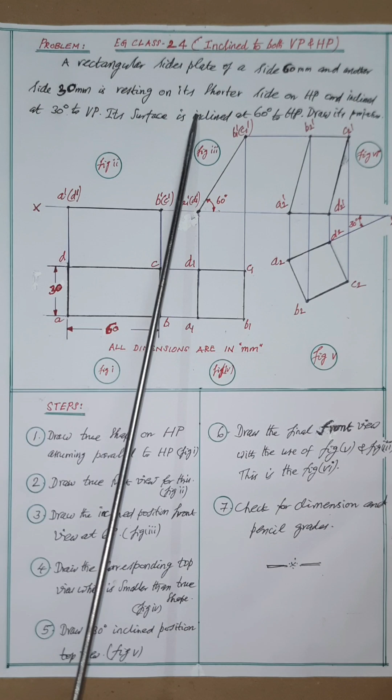A rectangular size plate of side 60 millimeter and another side 30 millimeter is resting on its shorter side on horizontal plane

inclined at 30 degree to vertical plane. Its surface is inclined at 60 degree to horizontal plane. Draw its projections. This is the problem given.

Here, as per terms given, the final image cannot be drawn in two figures as it is inclined.

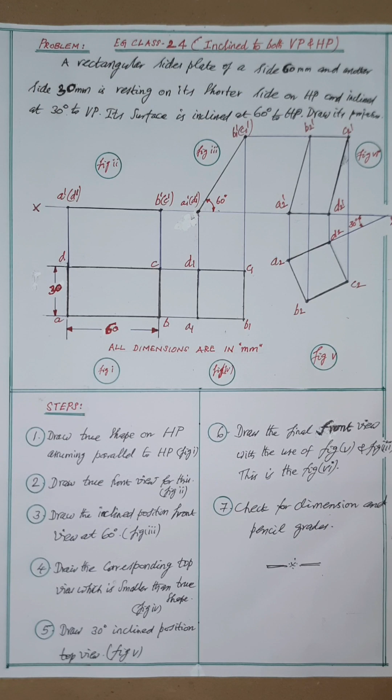Moreover, since it is inclined to both planes at a time, the final image can be completed to both planes only in 6 figures as shown here in this situation.

Now, see here the completed drawing with 6 figures drawn in order and indicated for reference to draw only in the given order because that is the possibility.

As told earlier, drawing the figure is easier, but understanding each step with the reason why is important. That is why follow the steps.

That is, let me explain the step-by-step procedure in detail to understand with the concept for getting the benefit of doing the other problems on your own without referring.

As per step 1, the first true shape is to be drawn in the horizontal plane as top view, assuming its surface is parallel to horizontal plane without inclination and perpendicular to vertical plane.

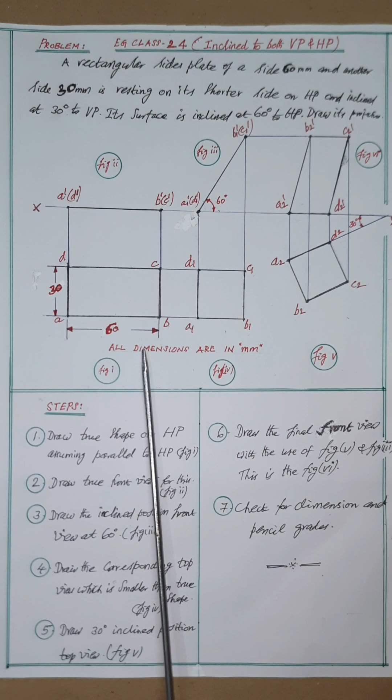Since it is rectangular as per the given problem condition, the shorter side of 30 millimeter is resting on horizontal plane. Hence, this side of 30 millimeter should be perpendicular to XY line,

that is, to vertical plane, at a sufficient distance. So, after the XY line and this side are drawn,

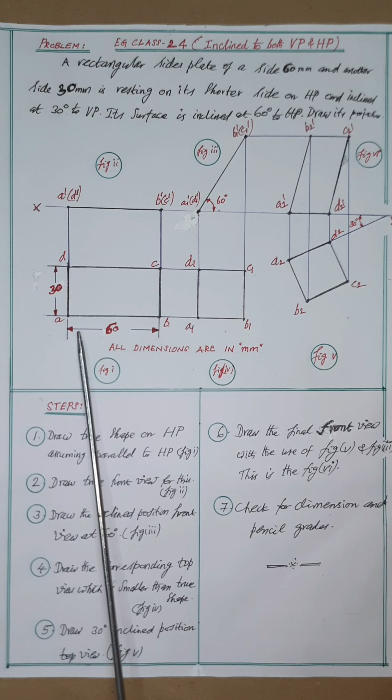draw two parallel lines to XY on the 30 millimeter perpendicular line and complete the rectangle with 4 sides as shown in figure 1.

This is the true shape and size of the plate through the top view.

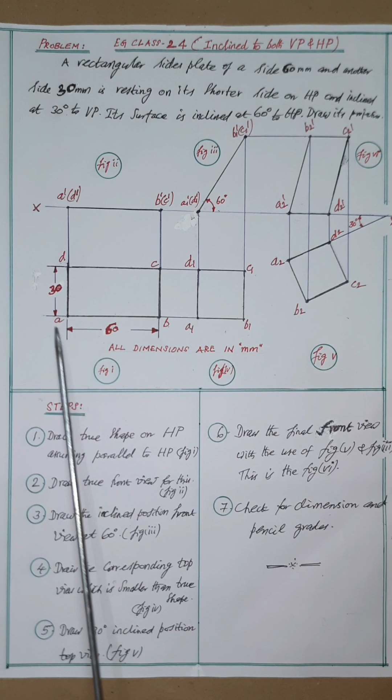Now, as per step 2, by projecting perpendicular lines to this figure 1, draw the front view as a single line on the XY line as shown.

This line is marked with front view letters as shown here, and this is the true front view when the shorter side is perpendicular to vertical plane, taken as figure 2.

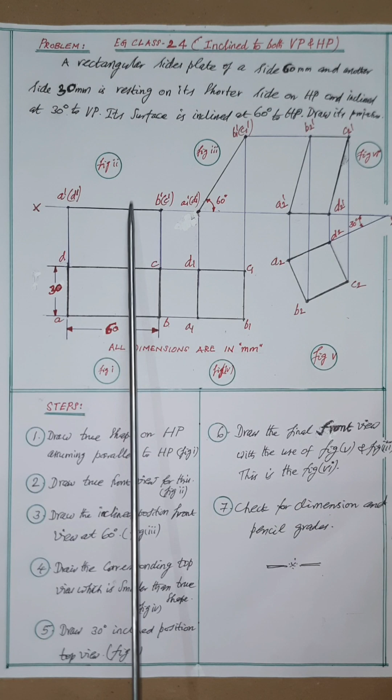This one is figure 2. This is A, B, C, D. Invisible corners are shown with letters within brackets, that is D dash and C dash, when seen as a front view.

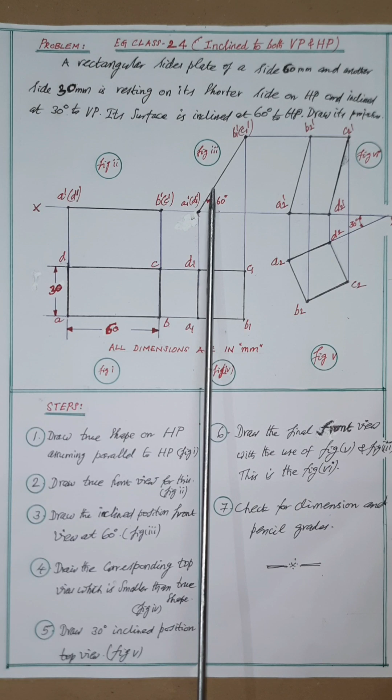Next, as per step 3, figure 2 may be drawn at a 60 degree inclined position to the same original length as figure 3, marked as shown with the 60 degree line.

This figure 3 is the front view position, that is 60 degree inclined to horizontal plane.

Now, as per step 4, the corresponding top view can be drawn in horizontal plane by projecting the lines below XY from figure 3 as shown here.

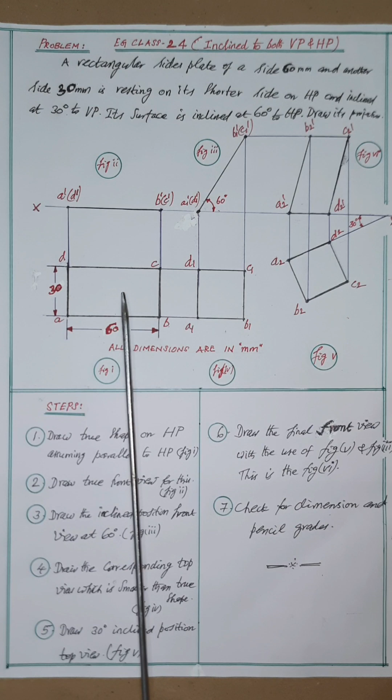Project figure 1 through parallel lines to XY. Both projected figure lines meet at 4 points as shown, name them suitably for the second top view as shown.

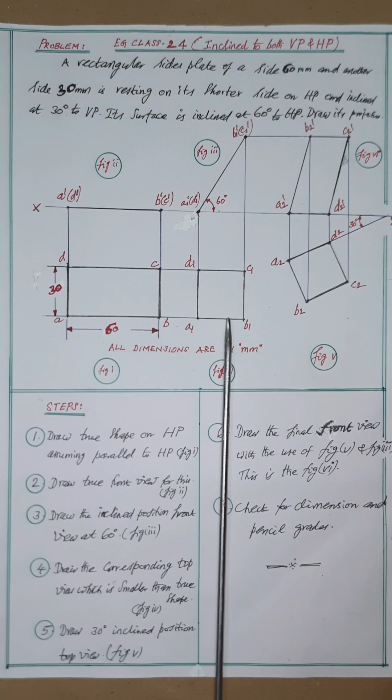This is smaller than the true shape shown in the first top view, and name this as figure 4.

Next, as per step 5, draw a 30-degree inclined line to XY as shown.

Since the final image is inclined at 30 degree to vertical plane, as given.

The final top view is similar to the second top view except satisfying the condition of this 30 degree inclined position. Hence it may be redrawn in the inclined line,

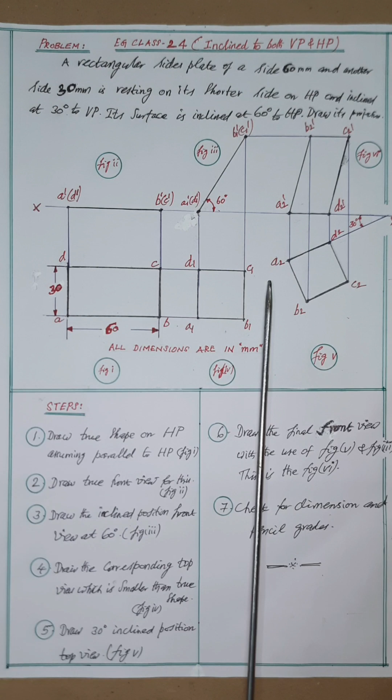merging the shorter length given in the inclined line, that is A2 to D2, that is A and D should

come in the inclined line, making other lines as shown, that is B2, C2.

Name the corners for the final top view as A2, B2, C2, D2 based upon this A1, B1, C1, D1.

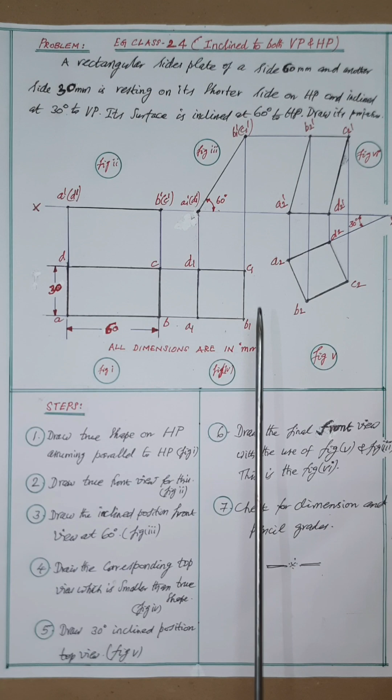That is, this is the final top view. Remember, merging the line with the inclined position should only be A1, D1 and then named as A2, D2 as

shown, without doing mistake, as this is the given condition in the problem. This is once again brought here for remembrance. Now figure 5, the final top view, is over.

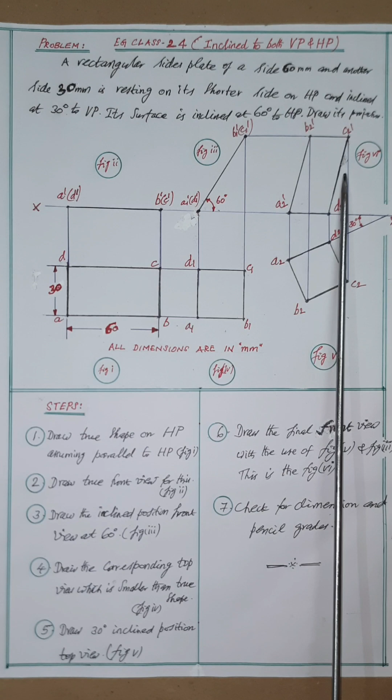Now as per step 6, project this figure 5 and also figure 3 so that both these figures' joining points give the new front view points.

Join the points as shown, that is, figure 5 and figure 3 joining points may be named with the corners seeing the similarity of the letters.

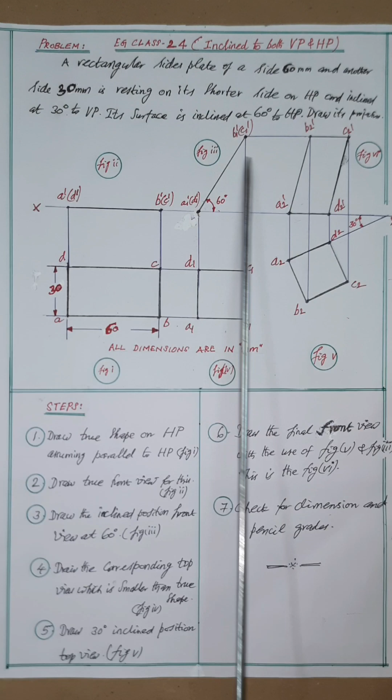For example, here it is A, this should also be A, here it is B, this should also be B. At the same time here it should come in the B line, and here also should be in the A line.

Then here it is C, here also C, in the same C line, likewise D and D, here also in the D line. After confirming A, B, C, D, all the 4 points, then make a difference for the final front view

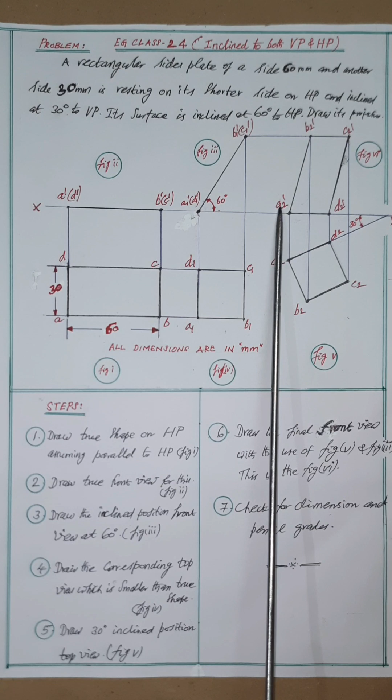as A2 dash, B2 dash, C2 dash, D2 dash.

Now all the points are joined and corners are named as listed. This is figure 6, the required final front view as required in the problem.

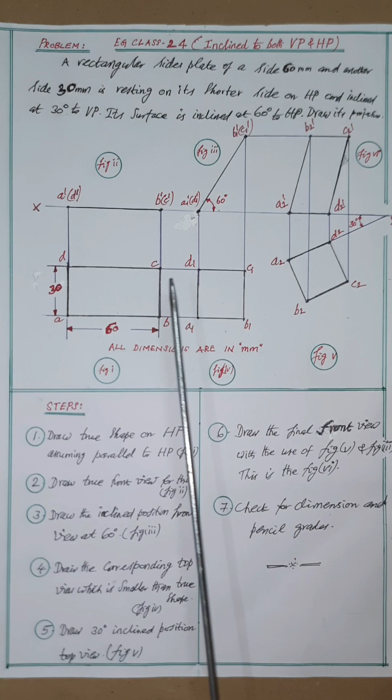Now the problem is over, and now check for the thickness of lines, which is to be done for all the 6 figures. The main figures are to be marked with dark lines, and all supporting lines should be

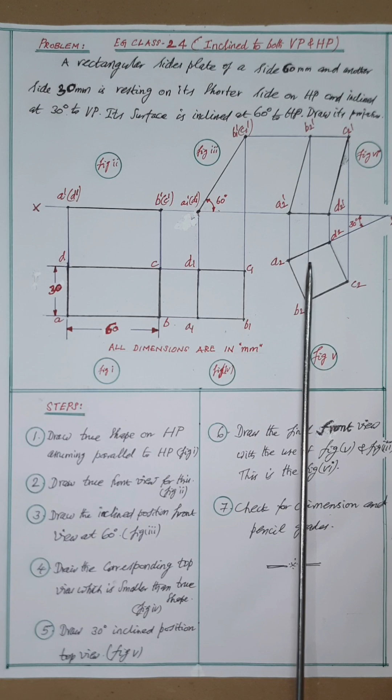thinner, using a 2H pencil for thin lines. The extension and projection lines etc. are all thinner lines. And as usual, no colors are permitted; remember, here it is only for easy